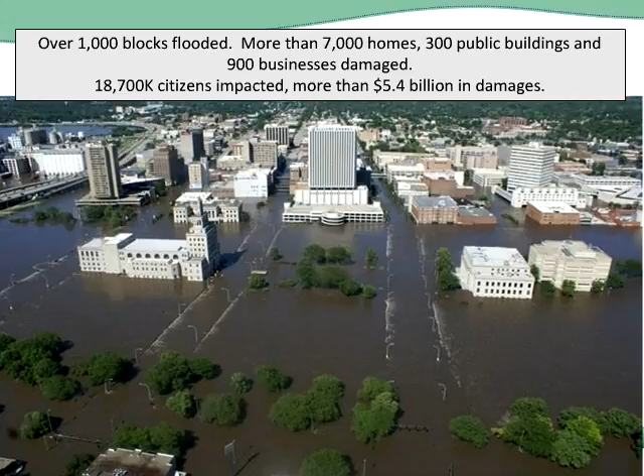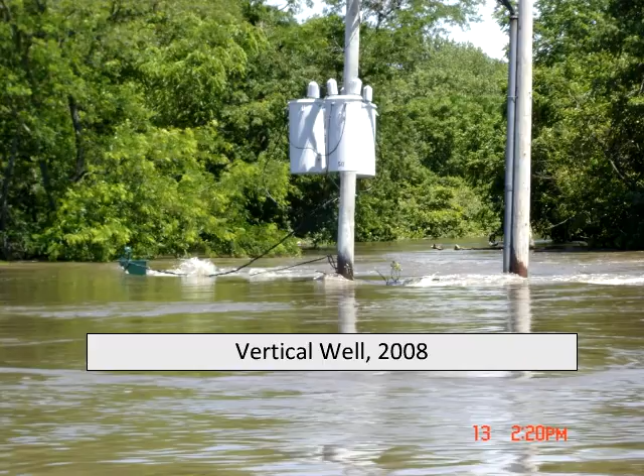When you look at this slide, and then when we go to the next one, as you can see, the top of this platform, at that point it was about that high, was where the 31 feet was at. So our mitigation step for the well system was, again, to raise our power supply and raise those motors on the wells up above, so they'd be protected to the 34 feet level.

So that kind of allows me to set the stage for some of the steps that we've taken since then, and I will provide some slides a little bit later that talk about some of the concrete steps we've done.

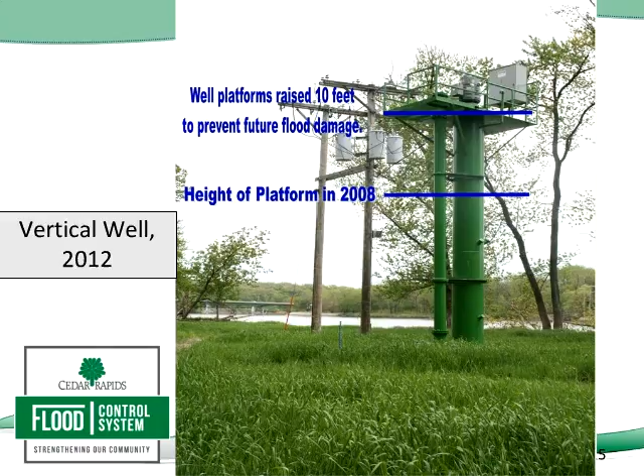Back in early 2014, we became aware that the Regional Conservation Partnership Program had been implemented as part of that recent Farm Bill, and that Regional Conservation Partnership Program allowed entities like a water treatment or wastewater treatment facility to become part of some of those RCPP projects. So we looked at that program and we felt that it addressed some pretty critical needs for our community.

So we developed, in partnership with an extensive partnership group, a Middle Cedar Partnership project, and that allowed us to use some of the existing Natural Resources Conservation Service resources, some of the County Soil and Water District resources as well, to look at going upstream in our watershed to implement activities that would help retain water on the landscape and could potentially mitigate some of those flood situations, but also have benefits from a water quality perspective in terms of holding some of those nutrients up there so they wouldn't impact our water supply.

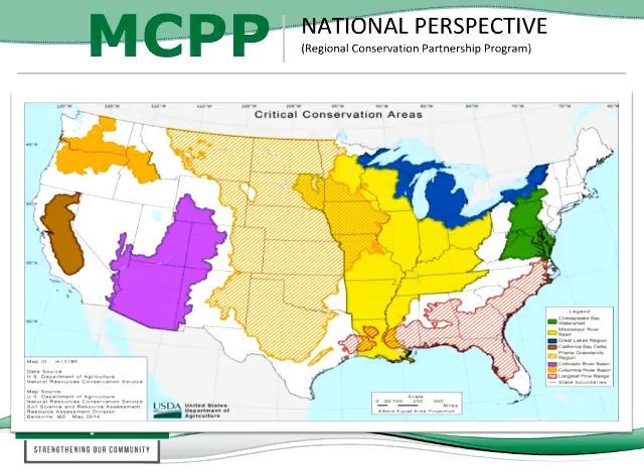We were fortunate on the basis of our pre-proposal to be asked by NRCS to provide a full proposal. We did that in October of 2014, and we were happy to hear the news in January of 2015 that we did receive slightly over $2 million through NRCS to support our Middle Cedar Partnership project.

We also have an additional 15 partners in addition to us that are contributing $2.3 million towards that project. And right now, the clock started on that project once we completed the agreement with NRCS in June of 2015.

But if you look at the summary of 3 of the watersheds, you can see some of those red triangles. And as we develop these watershed plans, those are areas typically at some of the headwaters where we want to work with landowners and producers on developing wetlands that will have significant benefits, both obviously from a water quality perspective, but certainly from a water quantity perspective.

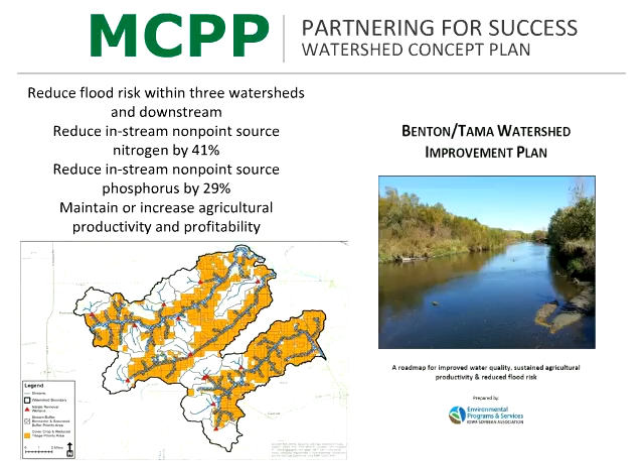One of the questions we typically hear when discussing this project with others is: will our watershed solutions happen fast enough to meet downstream needs? As you'll see when I talk about the 2016 flood we recently experienced, there are obviously some immediate needs and concerns. But when we started the Middle Cedar Partnership project, we knew this was going to be a longer-term effort. We're pleased that other projects are coming online that we think will help improve our interim flood control efforts as well as ensure the effectiveness and resilience of our long-term flood controls.

How do we connect with enough landowners and producers to make a difference? We're working in an area of 5 HUC 12 watersheds, about 130,000 acres. The area upstream of Cedar Rapids totals approximately 6,500 square miles, extending up into southern Minnesota, ultimately draining through our community, dealing with upwards of 6 million acres total upstream of us.

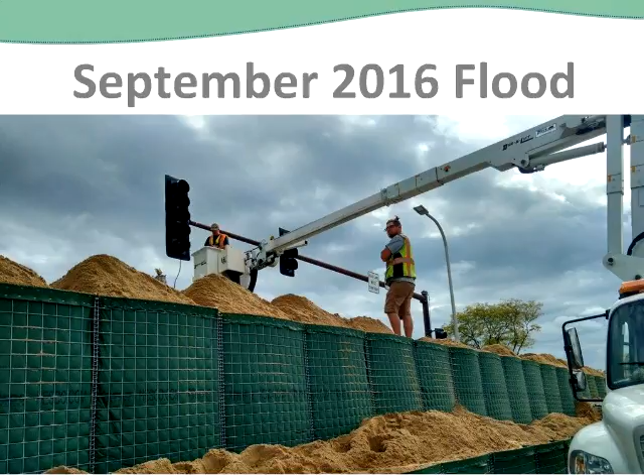That was a sufficient level that early on in the flood projections, we saw it go to 19 feet. Then based on some rainfall that the National Weather Service was predicting, they thought the flood potentially could get to 25.3. So we had 4 days to prepare for what we believed would be a 24 to 25 foot crest in Cedar Rapids.

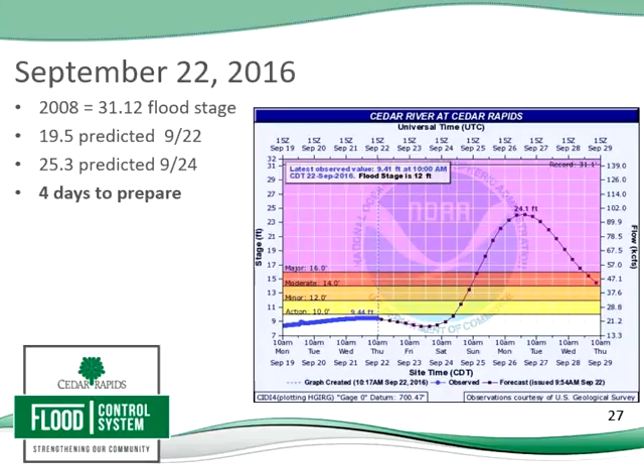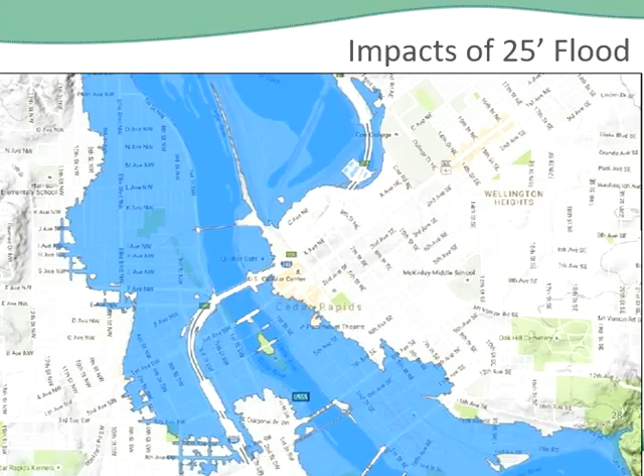Some of the immediate things that we did were to pull out our flood response plan and evaluate the interim flood response plan that we put together after the 2008 flood. We looked at all these specific areas - what do we need to do above ground, what we need to do below ground in terms of our stormwater system, how we're going to manage potential evacuation areas, and how we're going to communicate with our citizens and businesses.

The first step that was done was to initiate a recommended or voluntary evacuation zone to the 26-foot flood crest. There was a curfew in this area. We had checkpoints. It was pretty critical because over that weekend we had to construct this system, and if we'd been dealing with sightseers or anybody else that didn't have to be there, it was going to make it very challenging to get this system online in that short period of time.

One of the key steps from an above-ground standpoint was the use of HESCO walls and quickly constructed barriers. Keep in mind that we received notice on Wednesday that this was going to get to this level. Thursday was primarily spent evaluating the interim system, updating it, and putting together a plan to manage it. Construction ultimately started Friday night and continued to move forward until the flood crest the following Tuesday.

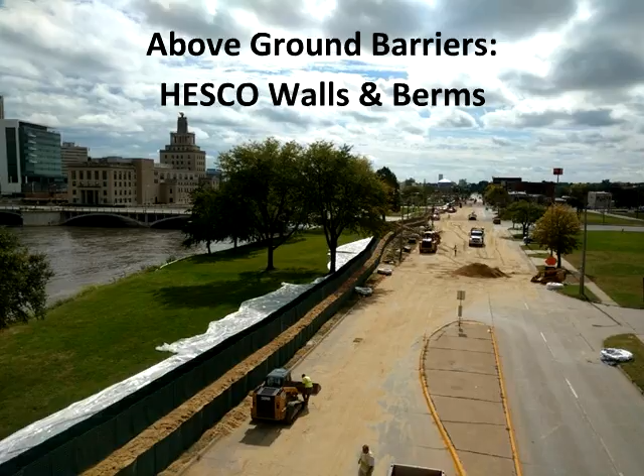In cases like this, you can see that there were actually multiple sets of HESCOs at one place, so there weren't necessarily 9 linear miles of HESCOs. There were cases where we actually had to stack numbers of them on top of each other to achieve the flood protection level that we believed we were going to need.

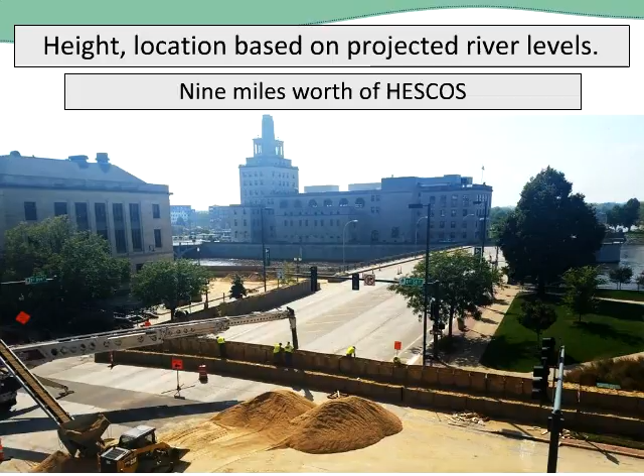In addition to the HESCOs, there were areas where we believed construction of temporary clay levees would be the most effective means of managing the projected crest. Keep in mind that all of that was constructed in under 4 days. We do have challenges when we look at this.

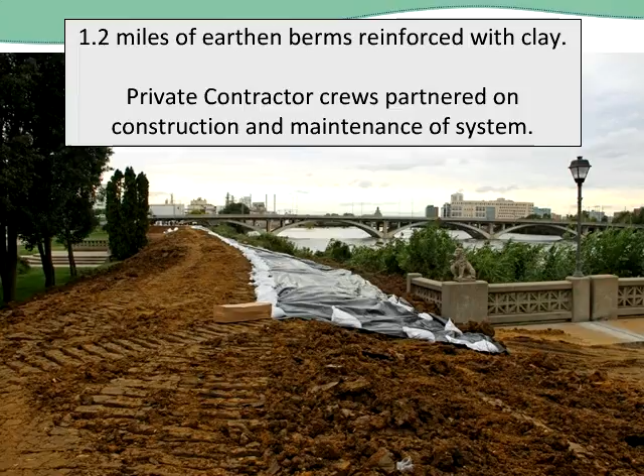There's a section of Cedar Rapids that is part of the lowest area of the city. It's affected by river levels as low as 20 feet, and with a projected 26 feet, you can see the HESCO system that we put in place to address that. When we worked with the Army Corps of Engineers, they looked at kind of the original line that we had, and they said, you're not going to be able to manage a HESCO system on that basis - it really needs a firm, solid street as a basis for that.

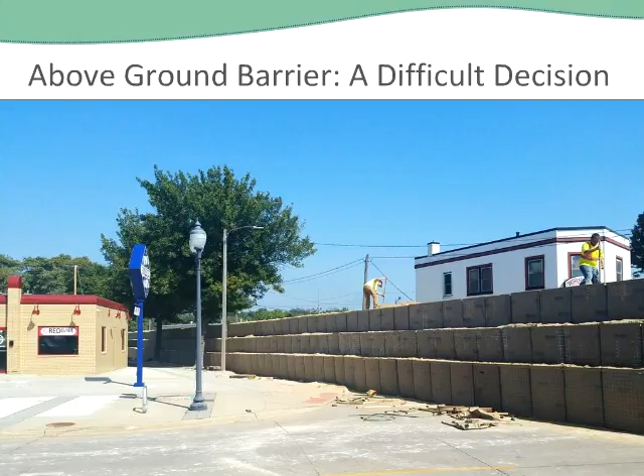So as you can see, we chose 16th Avenue Street as the point where we constructed those HESCOs, and we did have people on the west side of that who were impacted by this flooding level. As it happens, within 2 or 3 weeks after this, we'd already put together a bid to update the levee that would have protected this area. It's actually currently under construction, but during the incident at the end of September, it was not yet in line.

These are the choices that have to be made when you're putting up this system on a short-term basis. Some of the underground work, we don't have gates in place on many points on the stormwater system yet, so it takes a variety of means to protect those. Our private citizens responded aggressively, and upwards of 400,000 sandbags were filled and used in this effort.

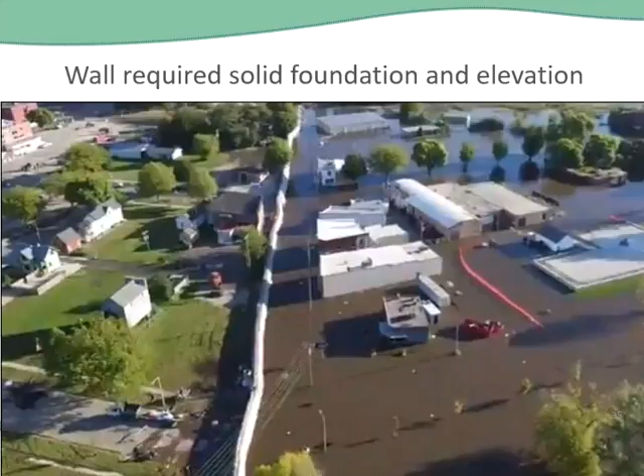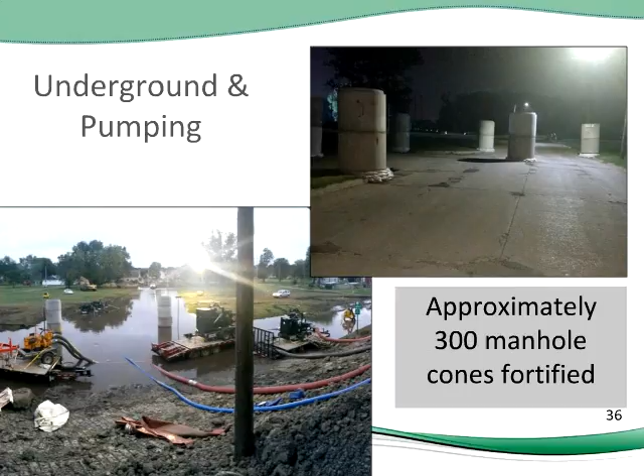We kept regular updates on our website. We conducted, I believe, 9 or 10 straight days of daily press conferences to provide information on what was happening, so we were able to be as transparent as possible. Even choices made with the flood protection system were addressed during these meetings. There was a lot of community pride in our ability to meet this need on a very short-term basis.

Just a few other comments about that. We did have a variety of lessons learned. We've upgraded some of the underground aspects, pump stations, and we recognize the need to have those pumps in place permanently, along with the gates that will prevent the river from backing up into that system. Some of those projects have been moved up in our priority list.

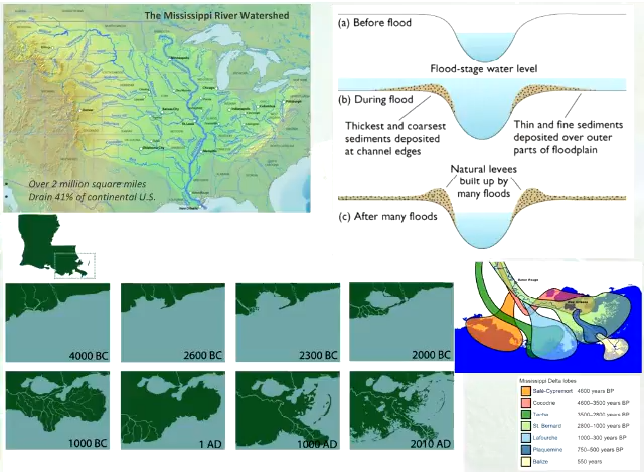We started building canals here to drain it. It was more of a swamp forest, very natural, with a lot of bayous running through that would also flood and create land. So there are high spots and low spots throughout the city we live in now, created naturally.

And of course there were 1927 floods of the Mississippi River, which really put river protection and levee building into place. We weren't in New Orleans affected by that flood, but really we have not been affected by an alluvial flood since this time. Of course, we've seen coastal flooding that has affected us.

But really what I'm going to talk about today is pluvial flooding, with a P, and that's really our main concern here, what we're working on, what I'm working on.

New Orleans receives an average of 64 inches of rain per year, and these often come in large amounts all at once. We get 5-inch rainfalls, 10-inch rainfalls, pretty often. You can see some of these photos—the one on the left is from earlier this year, I took myself—and this is common in New Orleans. Everyone who lives here knows about this. It's a challenge, and we're looking for different alternatives on how to work with this.

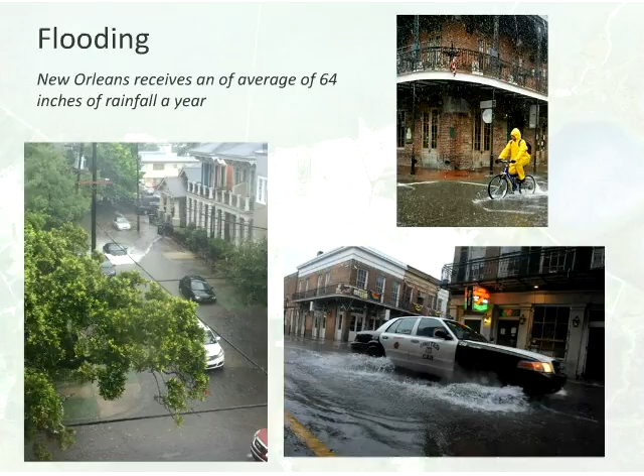There are also some consequences to how we've been managing our stormwater the past 100-plus years. We have soils here in New Orleans that, because of how the land was formed, are mainly clay soil and organic soil. When those soils dry out, they'll either shrink and crack, like the clay soils tend to do, or oxidize, as the organic soils do when they lose their moisture—and then they disappear, so you can't get that back.

So what happens is the land starts to shrink and subside and go down, and some of these pictures show what's happening to a lot of our buildings around town, our streets, and our infrastructure.

Houses that are built on piles are safe, but the ground around them will sink, so it's something we're definitely concerned with. We've been studying the effects of that. How can we mitigate that? How can we change what we've been doing that's been effective, and also work in coordination with that? So it's an integrated approach.

Here's a slide that shows a transect through the city from north to south, from the river to the lake, which shows some of the soil and high points. A lot of the city is below sea level, so we're studying the soils, seeing where infiltration is possible, and how to keep those soils moist.

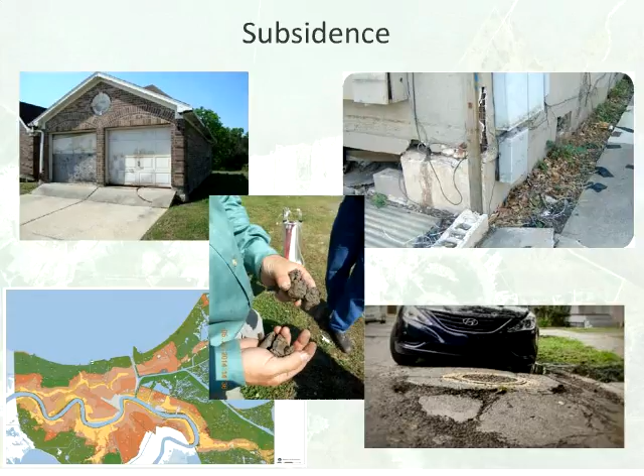We're also dealing with water quality issues. Where does all that water we pump go? It goes straight to the lake in most cases, so it's not treated. It's an MS4, a municipal separate storm sewer system. We've had TMDLs, we've had a consent decree, so basically we're looking to improve the water quality that is pumped into the lake.

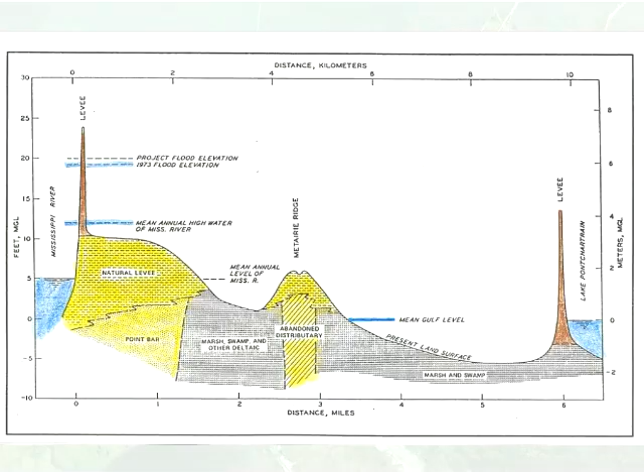We're doing a lot of different programs to do that, and the main program I'm working on is the green infrastructure approach. This basically mimics the natural hydrologic cycle, encouraging infiltration and filtration. It uses plants and soils to hold water, either temporarily while the drainage system catches up, or permanently, infiltrating into our groundwater.

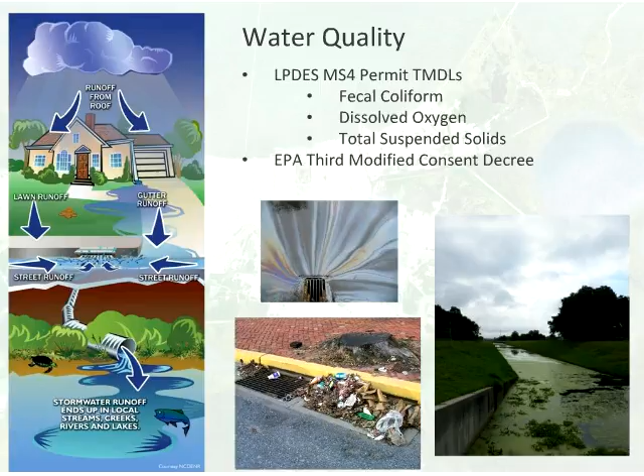We do have a high groundwater table, but that's what it's supposed to be, and we want that to remain high to keep our soils moist. It's about maintaining that level, because we also experience a lot of drought here, in which case the groundwater level goes down, and we are monitoring that as well.

We think this will save money, create jobs, and improve quality of life—the triple bottom line: social, economic, and environmental benefits, all from green infrastructure.

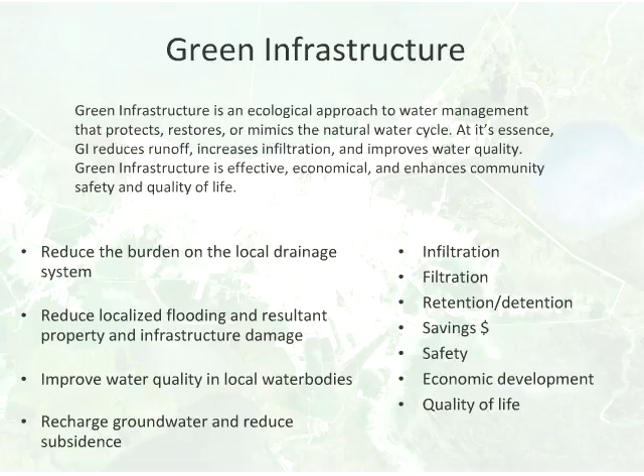So what I'm going to talk about now is what we're doing for green infrastructure. In 2014, in order to meet the requirements of the consent decree, we wrote a green infrastructure plan, which was submitted to the EPA and Department of Justice. In that plan, we stipulated that we would spend $2.5 million over a 5-year period of our capital funds.

To create green infrastructure projects, educational programs, outreach and demonstration projects across the city. Really what we're trying to do is start the discussion, start the movement towards this type of practice, whether through capital money, public money, or private investment. This is really the beginning of it for our city, and there are a lot more programs going on now. When we started, we issued an RFP, basically a grant.

For the first year, we did $500,000 and awarded 7 grants. Then in 2015 we did 3 more, and 3 more again this current year. So a total of 13 projects have been funded, as well as a couple other initiatives that are green infrastructure related. I'll go through a couple of those projects specifically.

Here's a map that shows where they are across the city. I need to update the outreach dot because we've done a lot more since I made this map. We're really trying to reach the entire city, all neighborhoods, and it's been very successful so far.

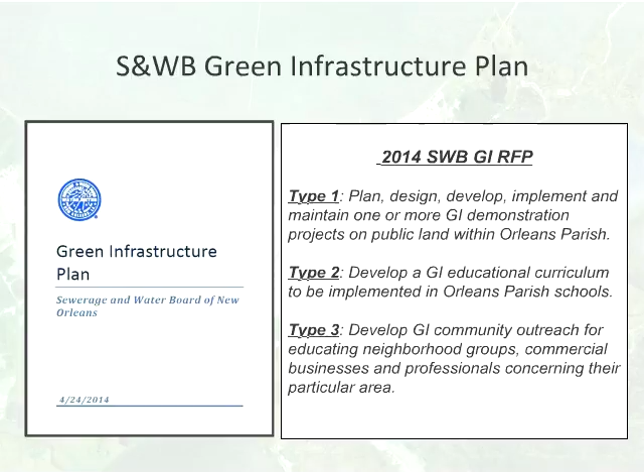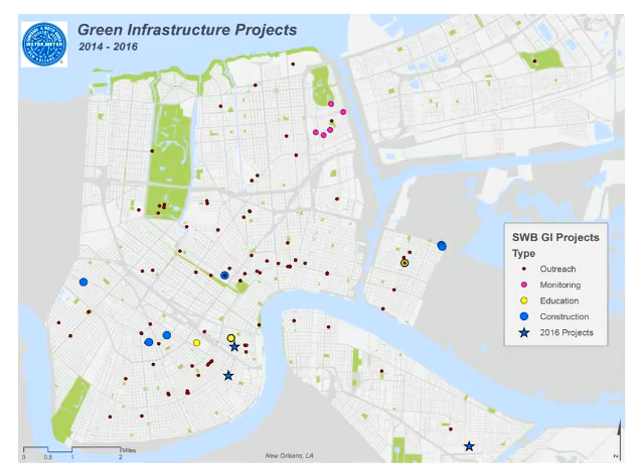This project is one of the first we funded. It's an educational curriculum program that's gotten a lot of press lately, and it's great. It basically teaches teachers about our water system—a water literacy curriculum. You teach the teachers, they create the curriculum, and it was originally for a kindergarten through 4th grade school in our Central City neighborhood. Each grade level had their own custom designed water curriculum.

The idea is that kids go home and teach their parents, and the kids grow up to become future leaders in our water sector. This is new—we haven't had this type of programming in our schools, which is kind of surprising, but this is the beginning. It's the ripple effect; it will spread to more schools, more regionally, and maybe even nationally.

The program we funded is completed, but we've gotten an EPA education grant to keep it going.

We're really excited about that.

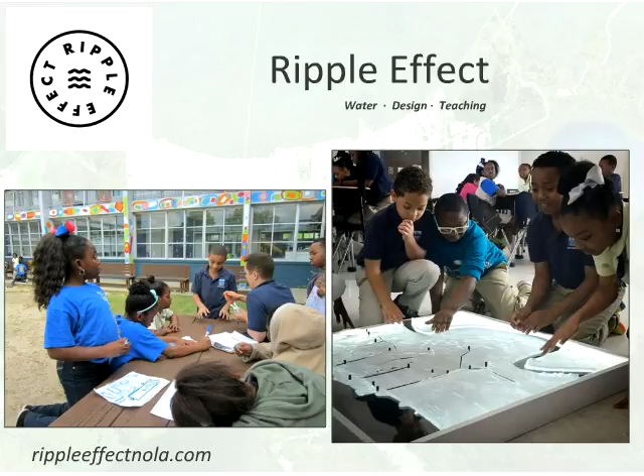This is a project we funded, the Groundwork New Orleans. They took a vacant lot. One thing I should mention is all of our construction type projects had to be on public land, so we partnered with the New Orleans Redevelopment Authority, who owns a lot of the vacant land in New Orleans, vacant since Hurricane Katrina. There's a lot of empty lots, and we're looking at ways we can use these lots as a stormwater management feature. They've also created a pavilion and do a lot of outreach. This project in particular used high school students called the Green Team to do all the work, so the construction was done by volunteers on the Green Team.

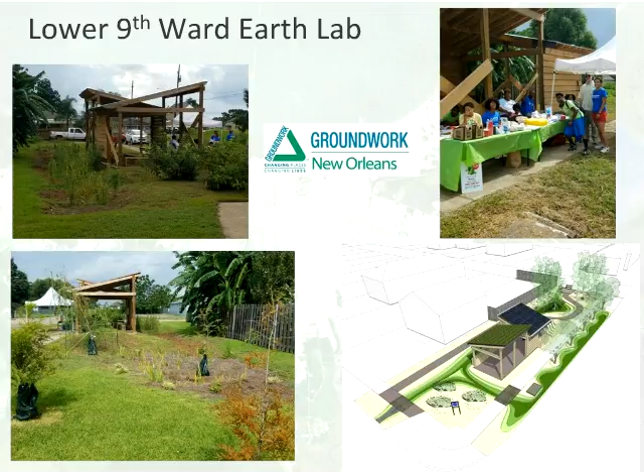Here's another lot. We're not the only ones doing this type of investment. As I mentioned, NORA, the New Orleans Redevelopment Authority, has many lots, and they've done a similar layout on a lot of their own lots. This is what we call a bioretention cell, where water can go off the street into this lot. It can be filtered, and when it overflows, it's already gone through a natural filtration through the plants and soils that will eat pollutants, and then overflow back into the drainage system or stay in there and infiltrate.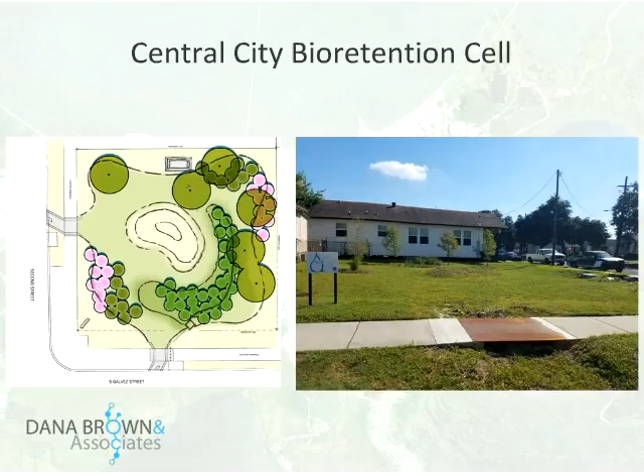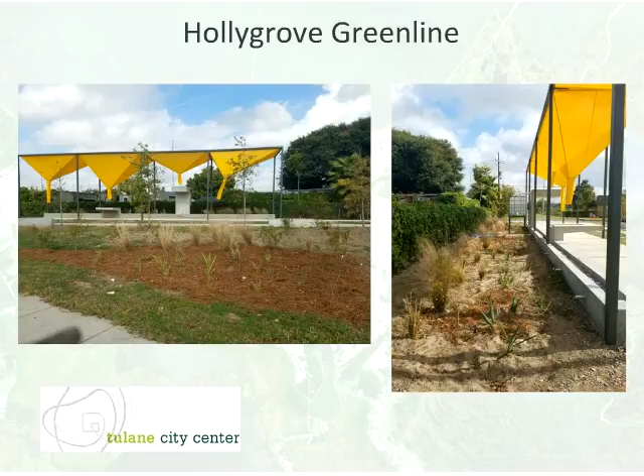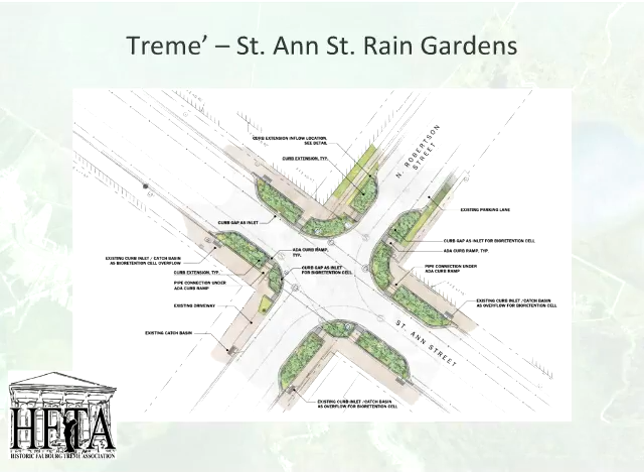It's going to be really exciting to go through this, because it's the first green roof that we know of in New Orleans and the region, and maybe even the South. If someone else knows of something at this scale, type it in the chat room. Hopefully during some of these conferences, we'll have the opportunity to go up there and take a look.

We have another green roof and blue roof right after this one. It's on a school, also down in the Central Business District, where there's not a lot of green space. We have a blue roof section on top that channels down into a green roof section outside of the Environmental Science Department, and then it overflows into an on-grade bioswale. This is scheduled for construction this month, breaking ground soon.

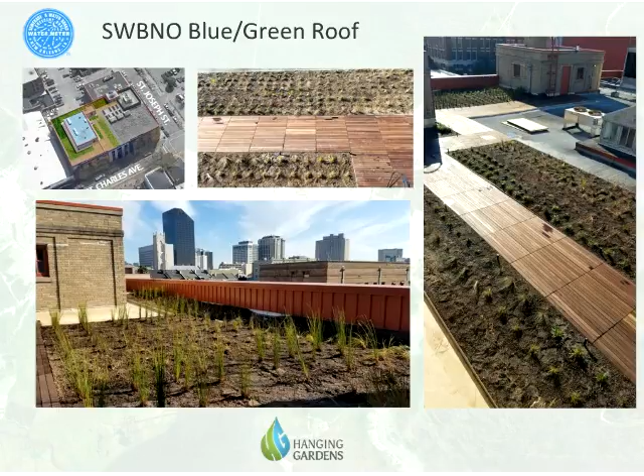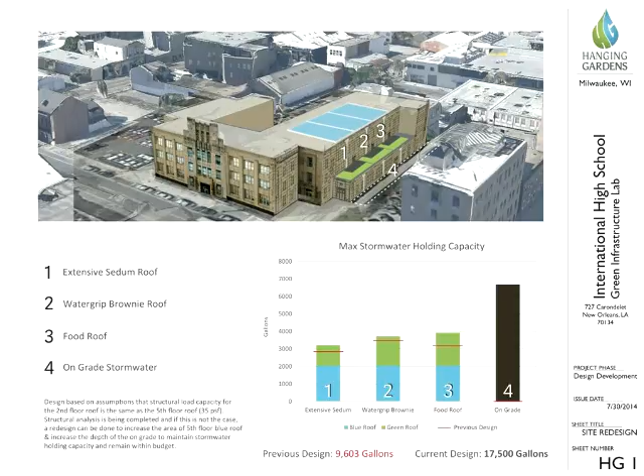Back when this was awarded, they were not allowed to spend any of that money on water quality monitoring. So they partnered with us, and we got an EPA Urban Waters grant to do the water quality portion of it. We've been out there for the past year taking baseline data before the project is installed.

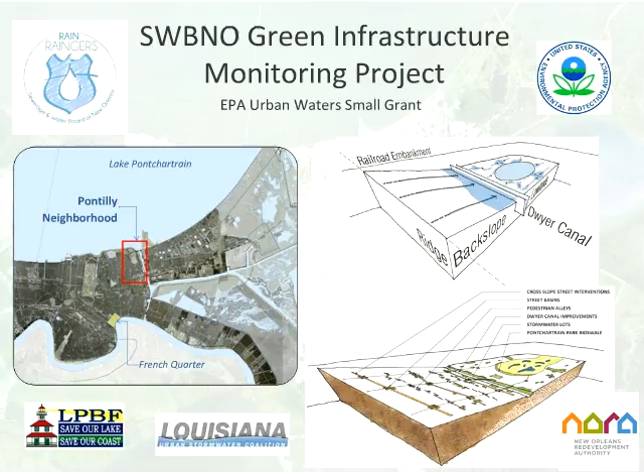We have 5 sites where we are taking grab samples for lab analysis, many different parameters: nutrients, oils, biological. After taking all that data, they're going to build the project hopefully very soon, and then we'll go back for a year afterwards at certain sites where there's going to be a feature, and we'll be able to compare the data before and after, to see how effective green infrastructure actually is in improving water quality and filtering pollutants, as we expect it is.

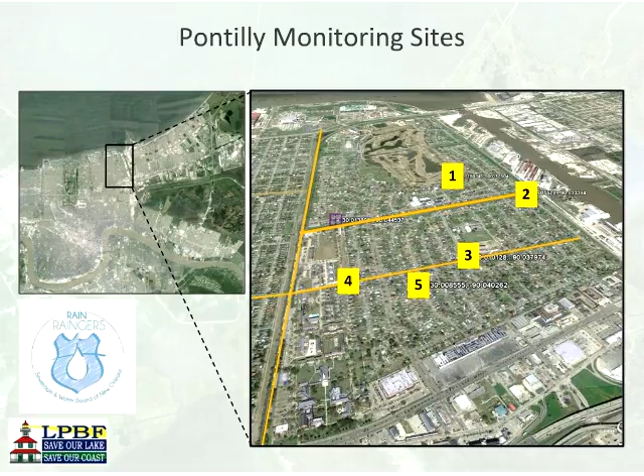We're hoping to create basically a new base map which shows more accurate soil data, where green infrastructure is suitable across the city, and where we can implement it successfully, versus where it will just hit a clay barrier and not infiltrate. All this data will be used on various tools that we have, like this one.

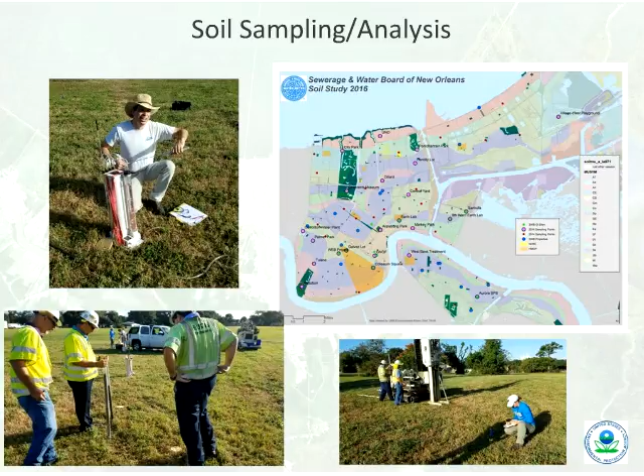This is funded by a couple foundations, as well as some local funding. Trust for Public Land has been developing this over the past year, very close to being ready for use. Taking different data, we're looking at their goals, which are cool, connect, absorb, and protect. There are different ways of gathering that data and using it to create layers within your map.

So the ultimate goal of this is to identify areas in the city where we can successfully install green infrastructure practices for stormwater, and where the needs are. We're also looking at social and vulnerability data, demographic data, and critical infrastructure that needs to be protected, to see specifically where we need to invest, using this tool in the early planning stages.

The next stage, we'll be looking to use this tool, which was developed and funded by Sewerage and Water Board, partnered with the city and the New Orleans Redevelopment Authority, and funded by a Dutch firm, Deltares, which is really like a mapping tool.

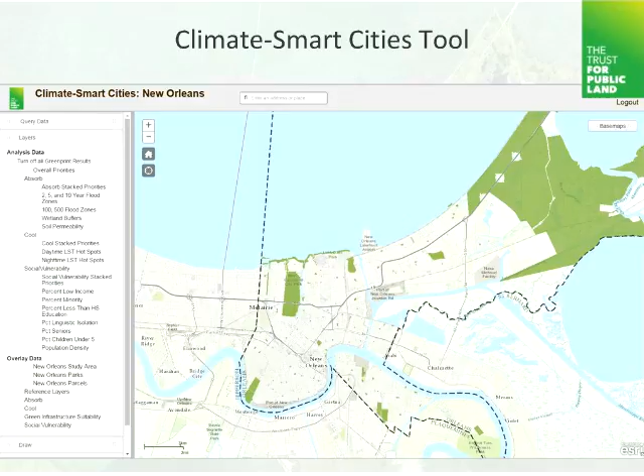It's actually taking a project area, and what you do is you choose different types of measures to install, and then it spits out outputs on how effective those measures are, how much stormwater you're capturing, how much of the heat island effect you're reducing, and things like that, and how much it would cost. It's meant to be used on a touch table platform - it's portable, you can take it around and show it to community stakeholders, have a workshop where they can actually touch and learn, and help the early planning process for large-scale projects, influence what they actually want to see. We're really excited to get this out there and start using it.

We also think it would help our own departments, our capital projects, how we would include green infrastructure alongside, say, a road replacement project, or a new pipe that needs to be put into a certain neighborhood. How can we put green infrastructure in there as well? So we've been including a lot of different data into this tool, and it'll be available probably around the first of the year as well.

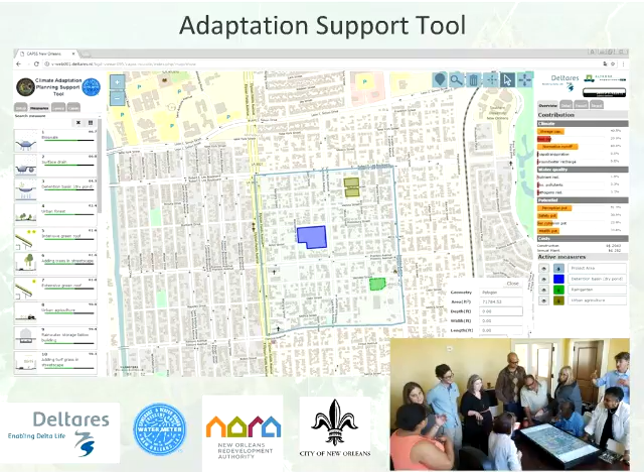So, as I mentioned, a lot of interagency collaborations. We're working with the City Planning Department. The Comprehensive Zoning Ordinance, which came out last year, has a new article that requires stormwater management for all new developments, capturing 1.25 inches of stormwater on the lot. We're working with them to review permit applications. Specifically, my department looks at the water quality portion of it.

We're helping because we're creating a new toolkit that will be available very shortly. It's about 75% complete at this point, which will provide standard details for different types of green infrastructure. We're creating a plant list of all native plants suitable for this area, drought resistant and flood resistant as well. We're also creating a stormwater calculator, basically an Excel spreadsheet highly customized to our city. We know there's many out there, like the EPA stormwater calculator, but we wanted one more customized for here. It'll help developers and applicants of the stormwater management plan, and it'll help reviewers as well.

We are also at the 1-year anniversary of our Resilient New Orleans plan, as well as the master plan, which is being updated right now, and the urban water plan from 2013. These are all guiding documents that we use, and they're helping us move forward.

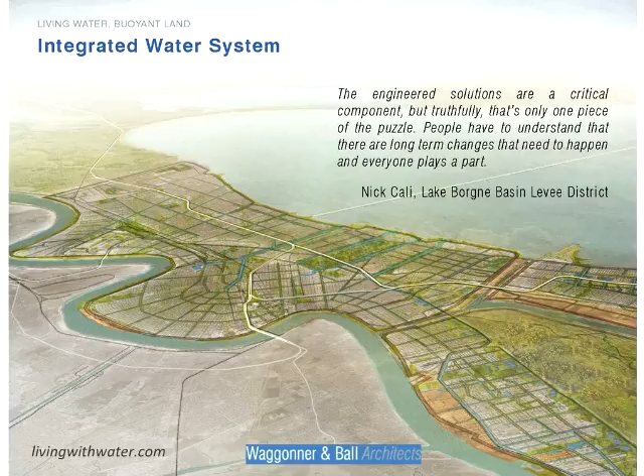One of the first projects that is really moving forward got extra funding, another FEMA HMGP grant, to create a large demonstration park called the Mirabeau Water Garden, which was actually part of the urban water plan as well - a more regional look at how to change the way we are managing stormwater here across Jefferson Parish, Orleans Parish, and St. Bernard Parish. This involved a lot of discussion with various stakeholders, looking at the way the Dutch are doing it, and how to handle the canal system, making it more beautiful, and how to manage stormwater differently than we have the past 100 years or so.

There's a lot of - I wouldn't say grassroots, but since Katrina it's just been very exciting to see all the individual stakeholders and groups that have come out of that really wanting to do something to help and change the way we're doing it. The Greater New Orleans Water Collaborative has done a great job of gathering all the right players - different organizations, nonprofits, private organizations, and also government.

So they have different working groups. They host different types of events and workshops regularly, monthly, looking at everything from coastal issues to urban water issues. We work with them a lot, in different working groups that we're actively engaged with.

Also, many foundations have been involved. We are one of the 100 Resilient Cities. The Greater New Orleans Foundation, we work with in a lot of different ways - they've hosted what's called the Urban Water Series, where they've brought experts from other cities to hold workshops. They've taken us and many city agency people to other cities to learn what they're doing, such as Philadelphia, Milwaukee, and Austin. They're also bringing more experts down to hold full-day intensive workshops, starting in a couple weeks. The Foundation for Louisiana is doing some workforce development and job creation type initiatives as well.

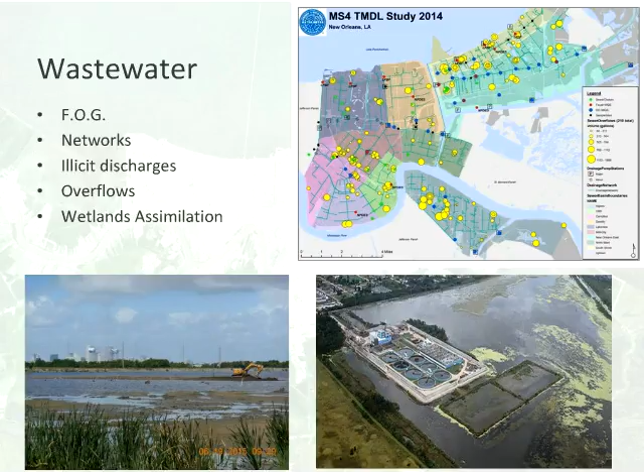I think I've given a pretty good overview of what I do specifically. Hopefully I can answer some of your questions as they roll in. But thank you very much.

Thank you to both Brad and Steve for those interesting presentations. We saw lots of questions coming in throughout both talks, and one that worked well for both of you relates to citizen engagement and outreach. We noticed you both have robust programs in that vein, and wondered if you could address, as a two-part question, how you get feedback on your projects using outreach and how you measure the success of your outreach programs. I noticed very numeric goals for some of the watershed plans and the like, but when it comes to softer skills like citizen outreach, what's your baseline and what are you working towards?